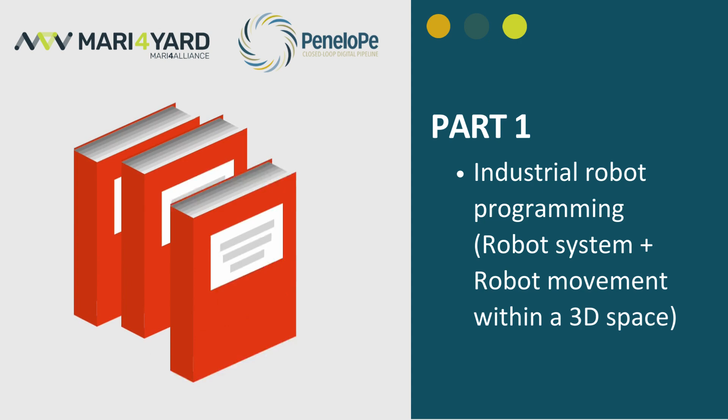First of all, I would like to introduce these training sessions, rather than starting by introducing myself, which I'm going to do a little bit later after some slides. These are training sessions regarding two European projects, Mari4Yard and PeneloPe, which we will speak about a little later.

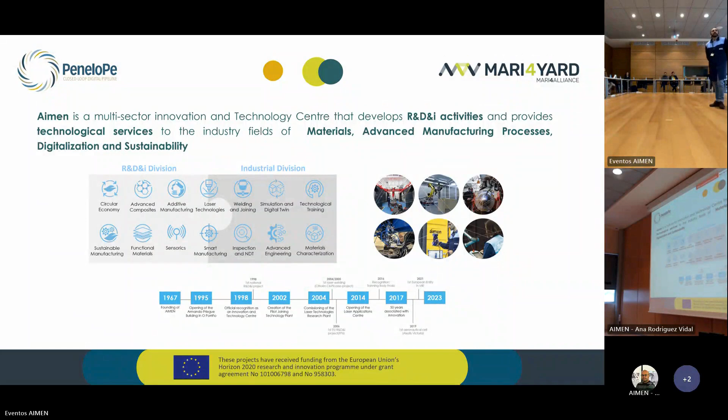The milestones of AIMEN as a company started in 1967. The first milestone is in 1995, when we started working in the Armando Priegue building here in Porriño. At the beginning, AIMEN was a small lab in the School of Engineering here in Vigo, but we started at Porriño in 1995. Another milestone is when we were recognized as an innovation and technology center in 1998.

In 2002 was the creation of the pilot joining technology plant here in Porriño. In 2004, we were recognized to start with a new building here in Porriño, the Laser Technologies Research Plant, which finally opened in 2014. AIMEN was 50 years associated with innovation in 2017. Finally, we are now in 2024.

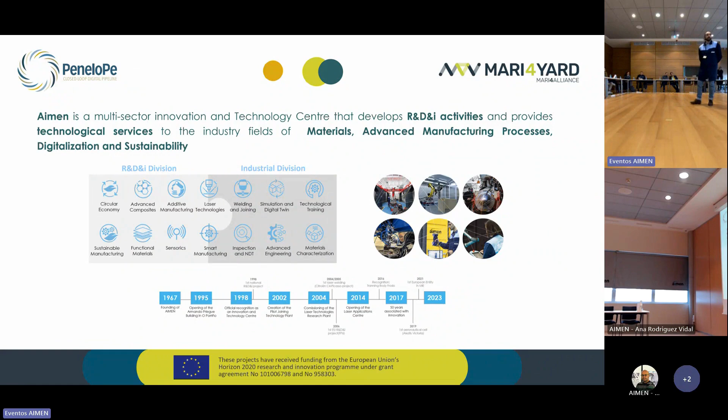About PeneloPe and Mari4Yard, both are European projects funded by the Horizon 2020 Research and Innovation Program. The first one, PeneloPe, is focused on the closed-loop digital pipeline for flexible and modular manufacturing of large components in industry in general. The second one, Mari4Yard, is more focused on shipyards. It's a project that aims to implement a portfolio of worker-centric solutions of different technologies, focused on small and medium enterprises.

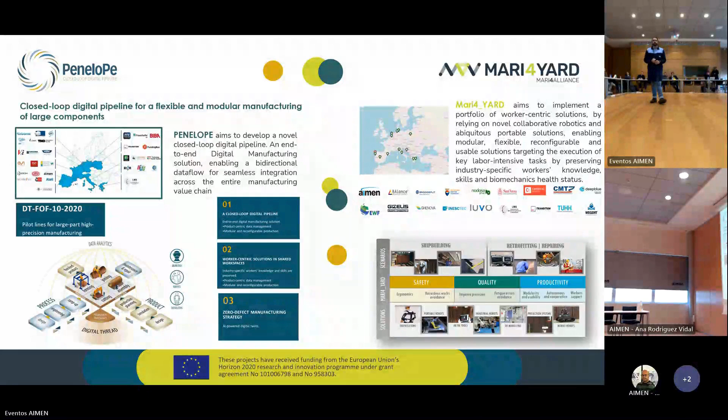What I want to present as well is the AIMEN Didactic Factory, which is aimed at training and upskilling capabilities, enabling the workforce transition towards Industry 4.0, and is also a general purpose test bed for assisting industry adoption of digital human-centric solutions in the new Industry 5.0.

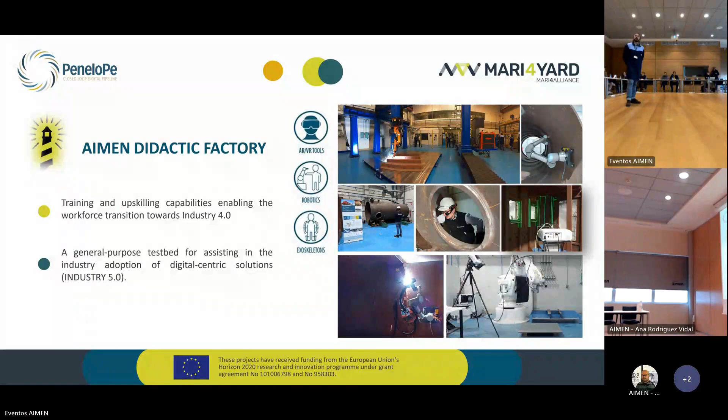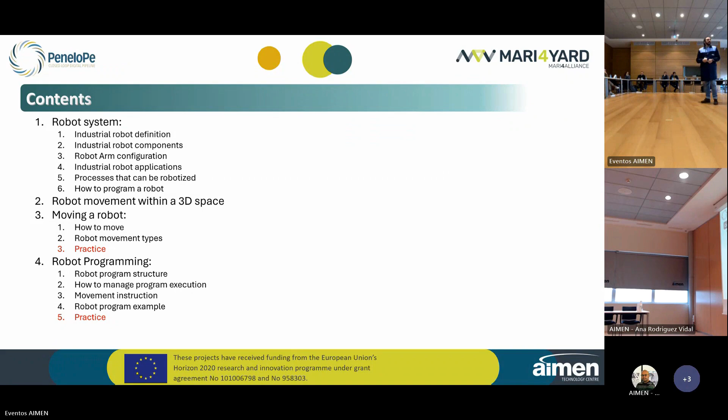First, regarding the robot system, the first point I would like to pay attention to is what is an industrial robot. Regarding the robot definition, an industrial robot is a programmable manipulator with at least three controlled axes, able to perform a lot of different tasks. What I want to focus here is on these words: programmable manipulator.

What is a programmable manipulator? It means that you can program this manipulator to perform different paths, different trajectories in space, so you can change it if you need to, to improve or modify some production process.

So I want to focus on this: it's a programmable manipulator. The second point I want to focus on is that it controls at least three axes. Why do we need at least three axes? Because, of course, the space where we move is a 3D space, so to move in this 3D space, we need at least three axes to move an object.

If we want to use this robot for a kind of process, we have to get more accessories. Which accessories? The first and most important is the tool, which is attached to the robot flange. If we want the tool to perform a process, we need, for example, electrical cables, water hoses, hydraulic hoses, pneumatic hoses, depending on the kind of process we want to perform with the tool. All these hoses and electrical cables are grouped in something that we call a dressing pack.

More accessories could be mounted in a robotic cell with an industrial robot. In this picture, we can see a track. It's an external axis where the robot is mounted, and with this kind of accessory, we can improve the robot reachability, to get to a greater space. So these are all the industrial robot components I wanted to show you and make clear with this slide.

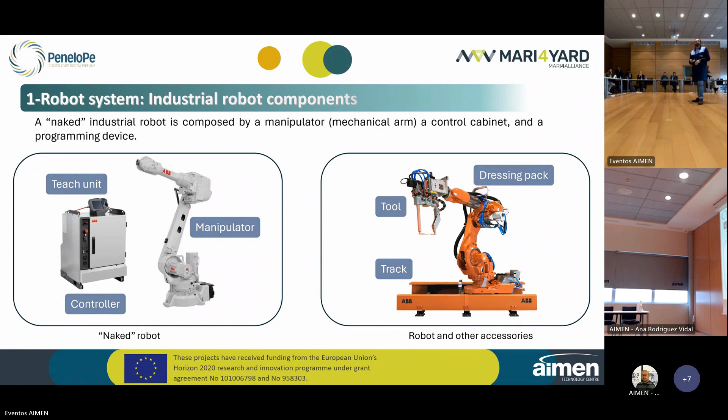It's usually composed of 6 rotary axes, driven by electric motors in each axis. So we have 6 axes, and every single axis has an electric motor driven by a device inside the control system cabinet. And this is the most versatile configuration that we can find in an industrial robot cell.

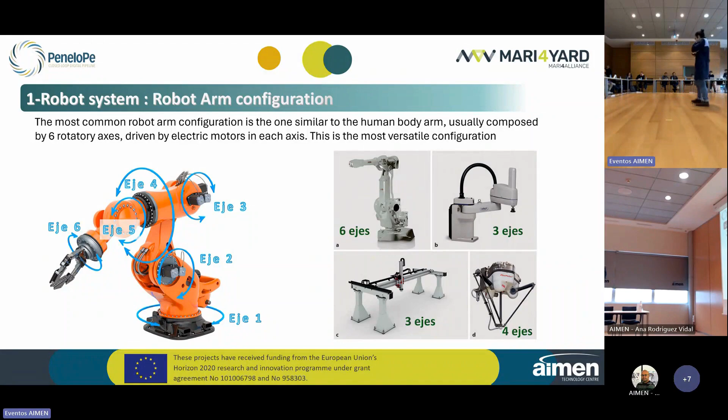Industrial robot applications. Okay, an industrial robot can be used to perform almost any productive process very quickly, precisely, and with high accuracy. This is important. So, finally, the robot's application is determined by the tool attached to the robot tool flange. This is what I told you before. The most important thing on the robot is the tool, because it's a device dedicated to the process we want to perform.

Here I wanted to show you different robot applications, all of which depend on the tool attached to the robot flange. On the left, we can see a couple of arc welding robots working with an arc welding torch for this kind of process. On the second one, we can see a spot welding robot with a spot welding tool attached to the robot. It's very high.

Usually, this kind of tools are very large, very impressive when you see that kind of robots working in automotive inside of cars with these huge tools. On the third example, we have a manipulation robot with a vacuum gripper attached to the robot. It's composed, as we can see here, of 4 suction cups, and it's able to handle boxes or any other parts we would like to work with.

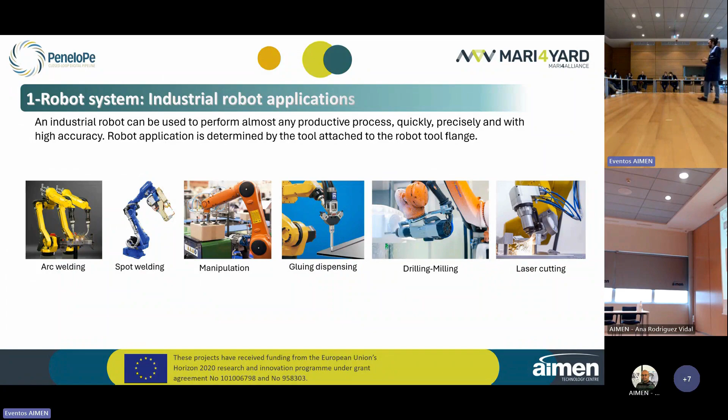We continue with the robot system description. I wanted to talk now on this slide about the processes that can be robotized. At the beginning, when robots started to work in industry, an industrial robot performed repetitive tasks in mass production systems where just one type of product or a few of them were manufactured repeatedly, performing one task again and again.

It's very common to find this kind of process in automotive, for example, where hundreds of robots work in the body in white and the pressing lines, as we can see here in the picture above. Different robots working inside a car with, in this case, spot welding tools.

But nowadays, the new trend is to try to use these industrial robots in unitary or very short run production systems. To reach this goal, we need new technologies like artificial vision, and many other applications are being developed to avoid depending on high-skilled robot operators. This is the most problematic for small and medium enterprises that would like to use a robot in their production lines: to hire high-skilled robot operators.

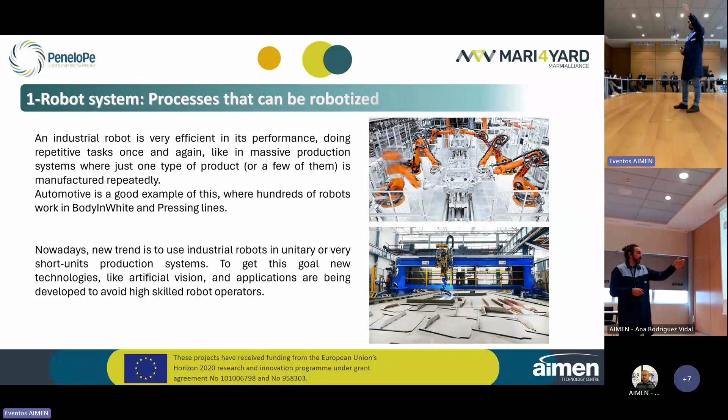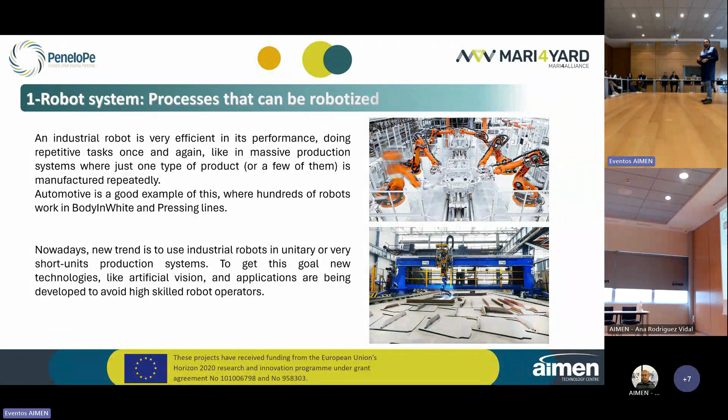So in the picture on the bottom, we can see an example of a robot working in a shipyard, where most parts may differ from one ship or vessel to another. So programming a robot for this is not easy. We have to start thinking about new technologies or applications like artificial vision to help perform these kinds of processes that are unitary and not mass production. Okay, so I wanted to make clear where the robot should be focused in its task.

Okay, now, which technologies or ways can we program a robot? On this slide, I wanted to show you these different technologies. There could be more, of course, but I'm going to present the most common technologies.

Okay, if we want an industrial robot to perform a process, we have to teach the robot movements. To do that, we have several possibilities. The first one, the most common some years ago, was using the robot teach unit to teach the robot trajectories, moving the robot manually with the teach unit.

We will see now. We can use as well robot simulator software to get the robot positions. That is another possibility. Another one could be to use a part localization system like artificial vision. We will see on a video here how to improve the robot accuracy from predefined positions that we could achieve from the teach unit or from the robot simulator software.

And as well, the last one I wanted to show you is using other guide systems like hand guiding, that we will see tomorrow in a training session here with another workmate.

Okay, on the picture here on the left, we can see different robot trajectories on a robot simulator that we can check there before translating these theoretical trajectories to the real ones on the robot. And this is all about the robot system. I don't know if any of you have any doubts so far. Okay, if not, we can continue.

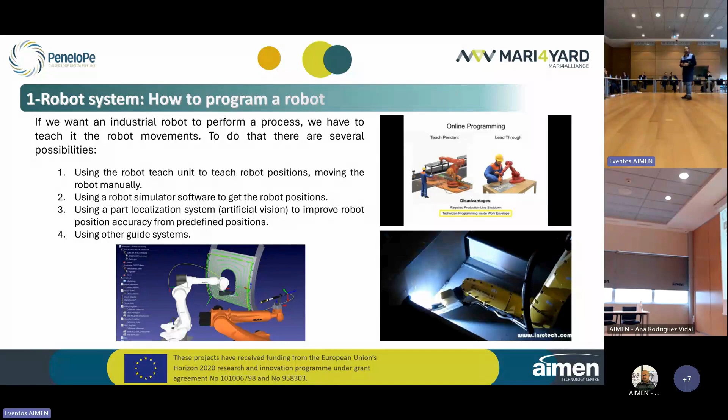Okay, now on the second point, I wanted to explain the robot movement within a 3D space. I want to give you these concepts before starting with robot programming, because this is very important to understand robot programming and how the robot moves in a 3D space. After that, we can start to perform robot programming correctly and with a good understanding of what we are doing. All right.

So in general, apart from the robot, now I'm going to speak in general about 3D objects. A tool on a robot is really a 3D object that we want to move. Okay, to move an object in a 3D space, in a Cartesian space, we need references to know how much and in what direction we want the object to move. So this is what we need, the references, to measure how much we want to move and displace this object in a 3D space.

To do that, we use Cartesian coordinate systems as a reference. And this Cartesian coordinate system is composed of one origin and three perpendicular directions, X, Y, and Z. Okay.

Okay, and in the picture on the right, we can see this auxiliary system and the position of the small plane regarding a reference system, and all of this is represented, not just the position of the small plane, but the rotation of the small plane, by these six informations: X, Y, and Z displacements, and rotation in X, Y, and Z as well. So this is something that we have to be clear about, right? How an object moves in a 3D space and why we need this information.

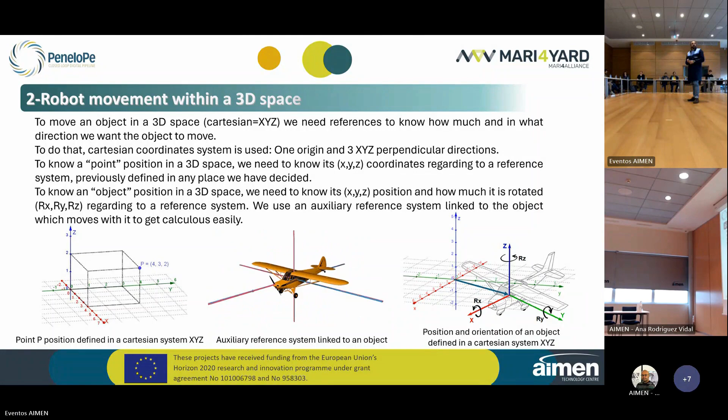And this is why I wanted to explain to you how a 3D object can move in a 3D space. We have to consider not just the X, Y, and Z, but the rotation as well of the tool in that case. We use that information to define and program a movement trajectory of that tool with the robot. Okay, as we can see, and it's explained here in the text.

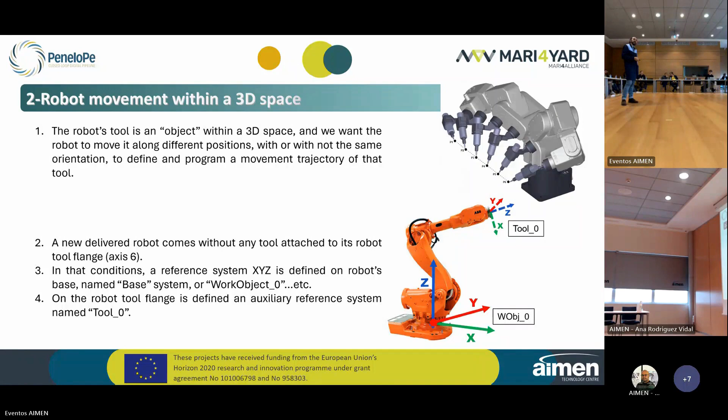And as we can read here, in this window we can read the information of the robot position in two formats. One possibility is to read the robot position of every single robot axis in degrees. Okay, we have 6 axes, so we should find information of the 6 axes in degrees. This is the angular format.

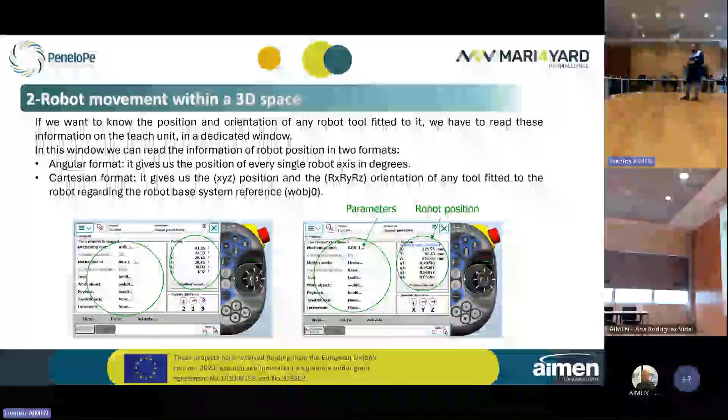Here, ABB shows us the information of the rotation of the tool in a specific way that is called quaternions. It's not very meaningful for us, but it's very useful for the mathematics inside the control system. For us, the rotation in X, Y, and Z is more understandable, but this information can be translated automatically. So, in ABB the way to show us the rotation information is in quaternions.

Of course, this information of the position coordinates is, in this case, of tool 0, which we can see in the parameters window, and regarding the work object, the robot base work object 0, as well. Depending on the tool that we select in this window, we can have this information or different information, and of course depending as well on the base reference. These are the two pieces of information that we need to select.

Okay, let me review this. If we want to know the position and orientation of any tool fitted to the robot, now we are starting to work with a tool attached to the robot flange. In the slide before I was showing you the naked robot, but now I want to pay attention to when a tool is attached to the robot.

Let me continue reading this information on the text. With this information, the robot is able to calculate the position and orientation of this point on the tool, and it can be read by an operator from an indicated window on the teach unit, the window that we saw before, on this window. On this window, we could select, for example, not tool 0, but another one that we have defined before, right?

the rotation, etc. This is something that is not in the scope of this training, because we have only 2 hours of training. It is not enough. But I want you to have this idea in general, and afterwards maybe in the future you have another, longer training course, and you can focus these ideas better on robot programming and robot handling.

Okay, this is for a new tool attached to the robot flange, but we also can define different base references for the robot. We started with the base reference, work object 0, attached to the robot base when the robot is naked.

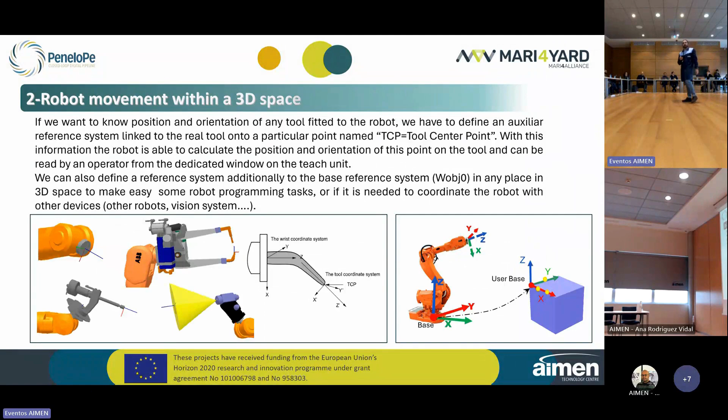So, as you can see, we started from a naked robot with different mathematical tools, different reference systems, auxiliary systems as well. Now, when we are dressing our robot with different tools, we start to define different mathematical things like user bases and new tool center points. Okay, and this is about the robot movement within a 3D space.

Now, I want to pass to point 3, about moving a robot, and how we can move a robot in space. Okay, a robot can be easily moved in two specific different ways. If we use one, we can't use the other one. This is why I wanted to say exclusive.

But within each of these two possibilities, there are two options to execute movements, because the easiest way to speak about robot movement, or really tool movement, is tool translational movement. But we can perform not just translational movement of the tool; maybe we can perform rotation movement. Okay, so there are both. There are two ways of moving a tool fitted to the robot.

To move that tool in a 3D space, with translation or in orientation, we can use two different ways. The first one is using either dedicated movement buttons on the teach unit or a joystick. It depends on the robot manufacturer brand. This option allows the operator to move the robot tool from one point in space to another point in X, Y, and Z or rotation, right?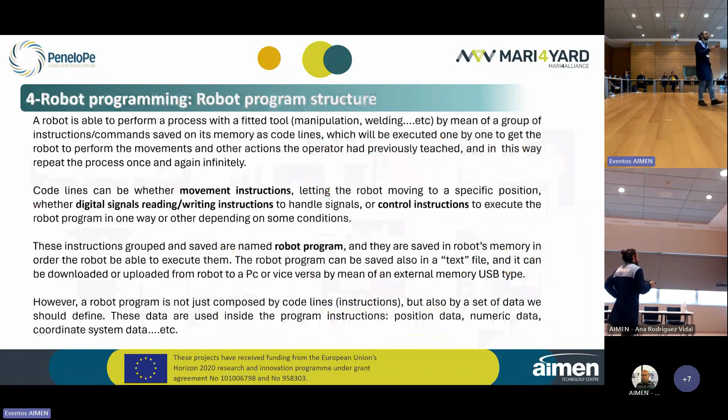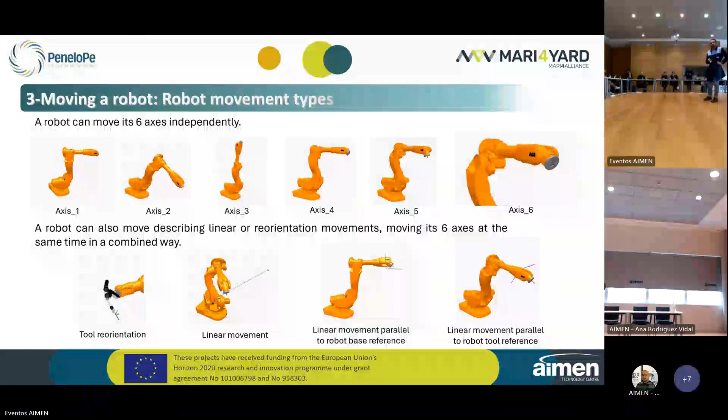Okay? And these are the robot movement types that we can perform with the robot, whether using the joystick in manual mode or the buttons, or executing a robot program. Now it's time to go downstairs to check all of this theory in a practical mode.

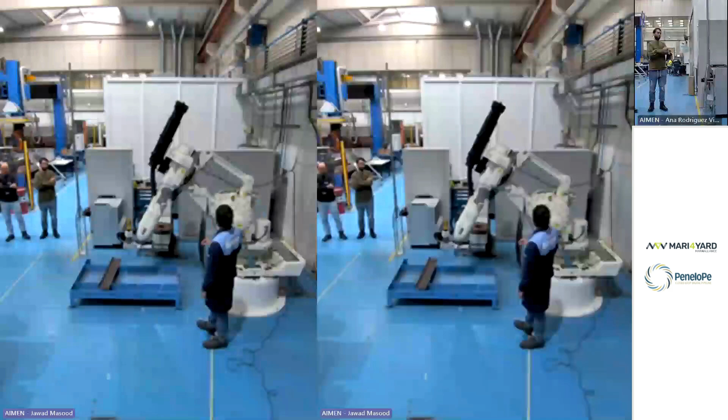What we have here is an ABB robot. This is a 6660 ABB robot. Now there is almost no tool here. It's just a small gripper tool fitted to the robot flange. There is as well a small joystick here. This is for the practice tomorrow for the hand guiding.

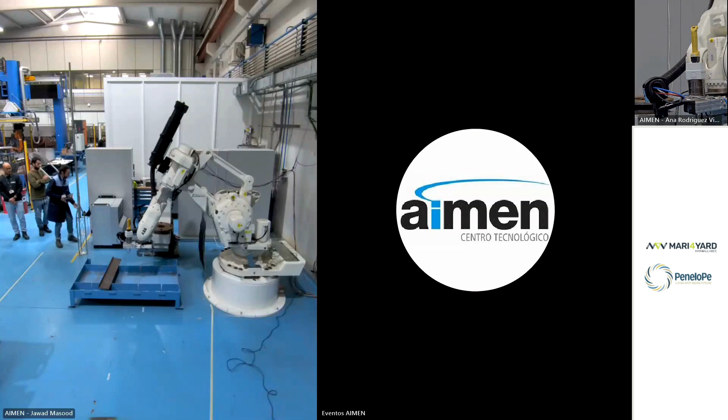This is the dressing pack, as I showed you before, to connect all the tools that we want to install on it. What we can see there behind, for the people who are online and maybe can't see it, let me move the robot to show you an external axis.

This is an external axis. We really have two axes, a rotatory axis, a rotational axis, to improve the robot's reach for some parts that we want to process there. This is the control unit, the brain of our robot. And this is our teach pendant, the teach unit, from where we can move the robot, program, and so on.

This is the teach unit, the real one, from where we can select different windows.

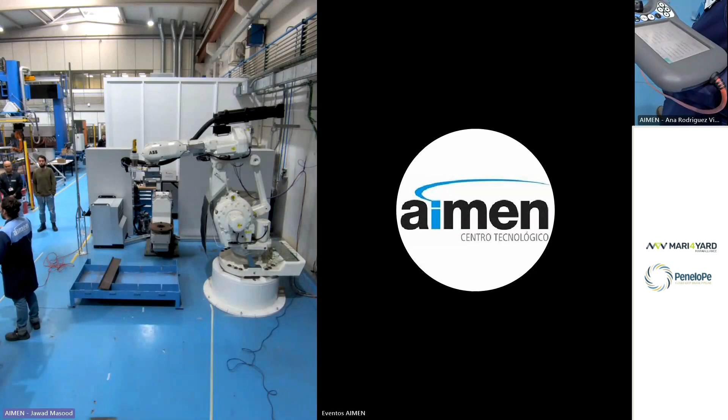So first, to help me move the robot, I have to select the dedicated window showing the position of the robot. To do that, I open the movement window, and from this we can see the same dedicated window we could watch upstairs.

Now I'm going to perform selecting the movement of just the first three axes of the robot. This joystick has only three freedom degrees, so I can only move three axes of the robot.

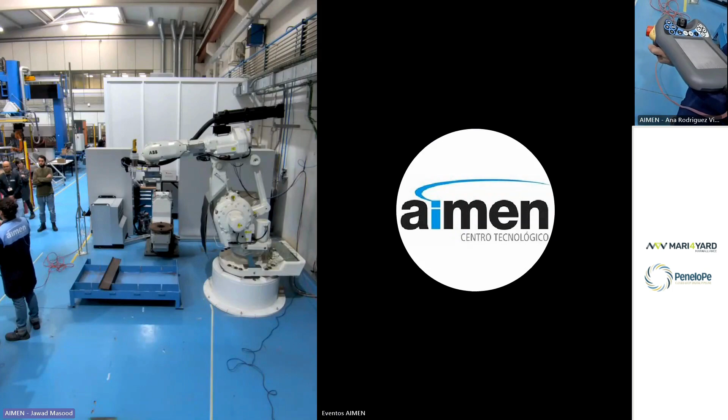To select the other three axes of the robot, I have to change here, pressing another button. So if I want to move axis number 1 from the base of the robot, this is the movement from one side to the other.

This is an analogic joystick. The more you lean the joystick, the faster or slower the robot moves. If you let go of the joystick, the robot stops moving.

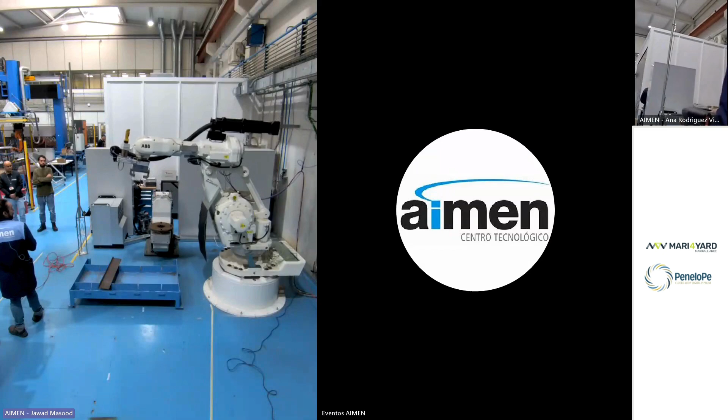This is the movement of axis number 2, and the movement of axis number 3. Now I switch the robot for axis number 4, 5, and 6, pressing one button, and now I can move axis number 4, number 5, and number 6.

To perform the same movements but linear, I have to switch the mode from single axis to linear movements, pressing one button. This way I can perform linear movements, for example in X, in that direction, or the other.

In this mode, the robot is moving all 6 axes at the same time, one of them faster and the others a little slower. This way and that way, we can also go up or down.

And of course we can perform rotation, but in this robot there is no tool center point defined other than tool 0. The rotation of this robot's tool can only be performed at that tool center point, which is at the center of axis number 6.

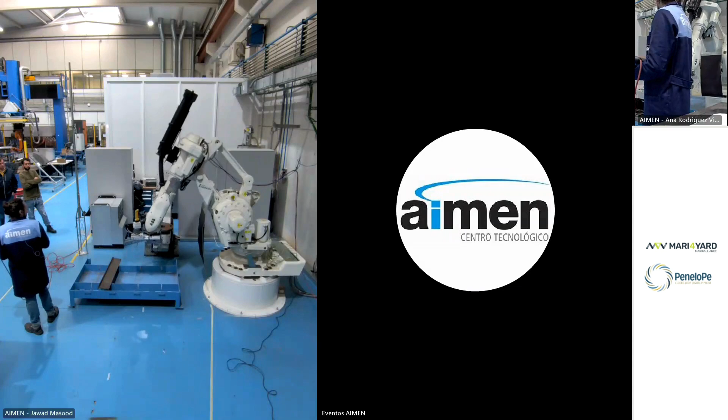So this is the way we can move a robot in manual mode. Another way is performing a robot program, which we will see in the second practice. If any of you want to work and try, go ahead, Maurice.

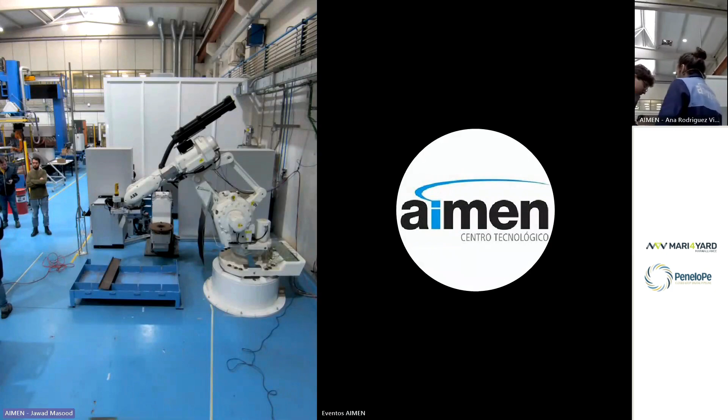So, are you left or right-handed? All right, try to put it that way. With these fingers, you press here the safety button, and now the robot's motors are on, and you can start to move the robot with the joystick.

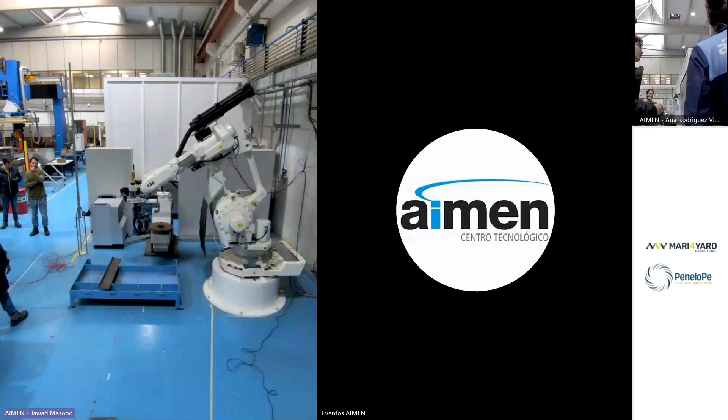It's very easy, very, how to say, intuitive. Yeah, really. It's like playing with the PlayStation or something like that. Younger people have better performance than me, for example, doing that. Yes, if you want to change for linear movements, you can do it, and you can realize that the movements are different.

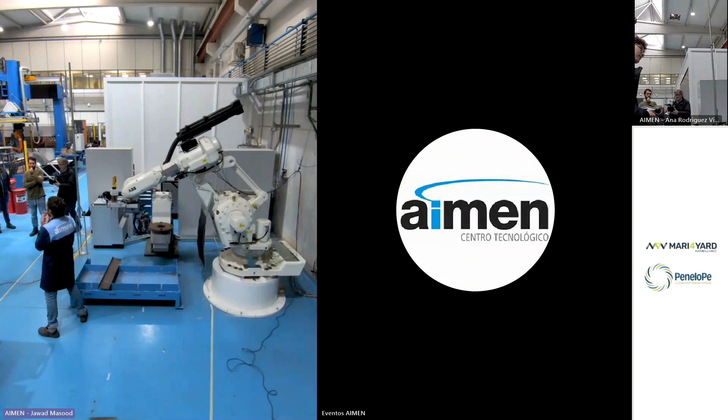Okay, we can decide, when we want to teach one point in the space, to go to this space moving each axis independently or moving the 6 axes with linear movements. It depends on us. Of course, the quickest movement is with independent axes if we know which axis we have to move. If not, we can use linear movements.

Of course, when we are near the part we want to process, we have to perform linear movements that are more accurate and more intuitive to understand how the robot is going to move. So I think it's easy to move. You need more practice, of course. We should have at least 2 hours moving a robot, more time, each of you. But

okay, do any of you want to try? Okay, you are right-handed. Okay, so go. This is the safety to start the motors. Push. No. Okay, push. Confirm. Yes, you have to hold on. Now the motors are on, so you can start to move the robot by moving the joystick.

In one way, in another one. If you want to change for orientation, you can do it by pressing one button there. This is linear, and orientation is the switch from one to the other. It's very easy. You have to pay attention to avoid colliding. If you move an axis a lot, for example number 5, you could collide the joystick with the robot arm. So you always have to pay attention when moving the robot to avoid any collision with the robot itself or with other parts, right?